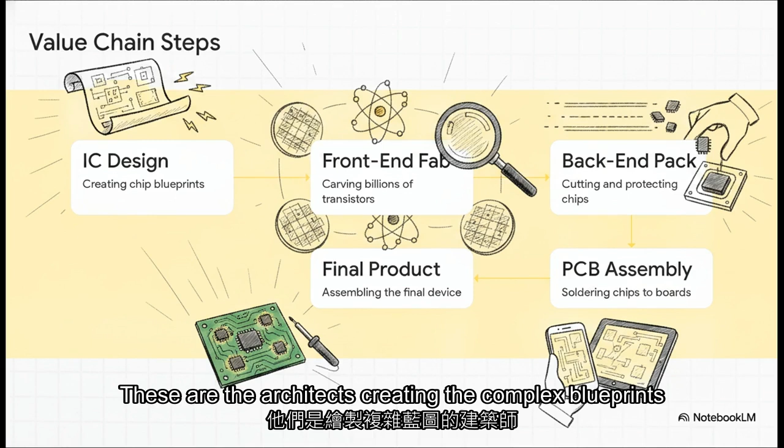Let's kick things off with Section 1, the tech relay race, mapping the electronics value chain. Think of the birth of any electronic product as a massive, highly coordinated relay race. It starts at the very beginning with IC design companies. These are the architects creating the complex blueprints. Once those digital designs are finalized, the baton gets passed to the front-end fab, which really acts as the beating heart of this entire ecosystem.

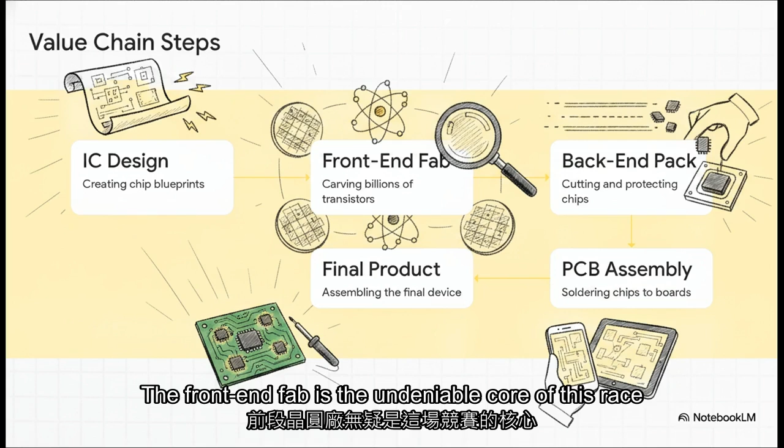This is the crucial stage where blueprints for billions of tiny transistors are physically carved onto raw, circular silicon wafers. After surviving that grueling process, those fragile wafers are passed to back-end packaging to be precisely sliced apart and encased in protective shells. Next, they move to PCB assembly to be soldered onto circuit boards, and ultimately they're integrated right into the final product you hold in your hand. The front-end fab is the undeniable core of this race. It's the crucible where pure imagination actually becomes physical reality.

Moving on to Section 2, the $16 billion fab, and why automation is everything. Remember that $110 a second loss we talked about a moment ago? Because the cost of failure is so astronomically high, a fab relies on a computer-integrated manufacturing system, or CIM. This is the fully automated digital nervous system of the factory, dictating every single movement and process. To avoid hemorrhaging money, fabs require this overarching software to maintain a staggering uptime of 99.9999%. To put that into perspective, that equates to less than 32 seconds of allowable downtime per year for an entire, sprawling mega factory. Stability isn't just a goal here, it is literally their highest guiding principle.

So why exactly is this environment so exceptionally complex to manage? Well, unlike traditional factories where engineers can just jump in and manually fix an assembly line, the front-end fab is a fully automated, completely sealed environment. Wafers move entirely automatically in closed, ultra-clean boxes called FOUPs, zipping along overhead tracks. There is virtually zero human intervention allowed on the line because we humans introduce unpredictable variables, like microscopic dust, which are absolutely lethal to the chips.

Furthermore, manufacturing modern advanced chips requires anywhere from 1,000 to over 1,200 completely separate process steps. Add in the fact that the system must intelligently juggle multiple different product types running simultaneously to maximize those expensive machines, and trace exactly which specific machine chamber a wafer passed through weeks ago for quality control. The logistical complexity is just staggering.

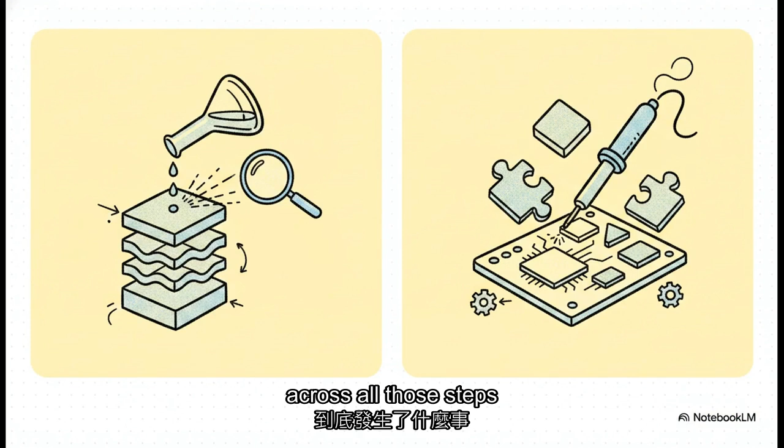Let's move to Section 3, Extreme Materials Science, Building Nanostructures. To truly understand what's happening inside those specialized machine chambers across all those steps, we need a fundamental mindset shift about what the word manufacturing actually means here. Traditional back-end assembly is what we typically picture, right? It involves managing a complex bill of materials, taking pre-made physical puzzle pieces and soldering them together.

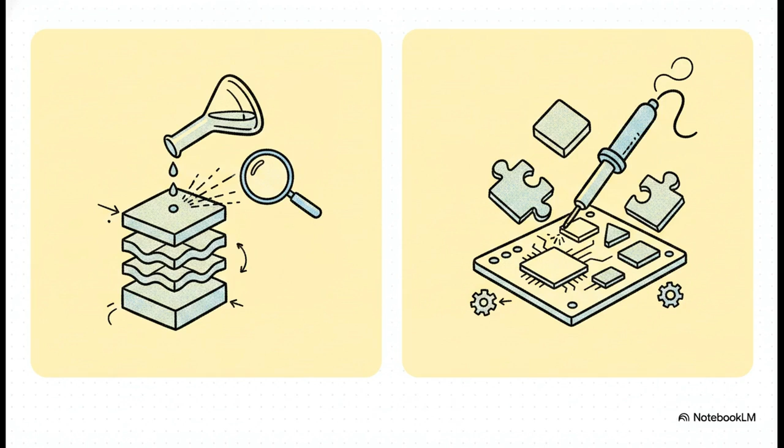But the front-end fab operates in a completely different paradigm. It's an exercise in extreme materials science. Instead of putting physical pieces together, it relies on the chemical deposition of ultra-thin films, the optical lithography of printing unimaginably tiny patterns with light, and the physical etching away of materials with plasma. It is literally carving and stacking nanoscale, three-dimensional structures layer by layer using aggressive chemical and physical reactions.

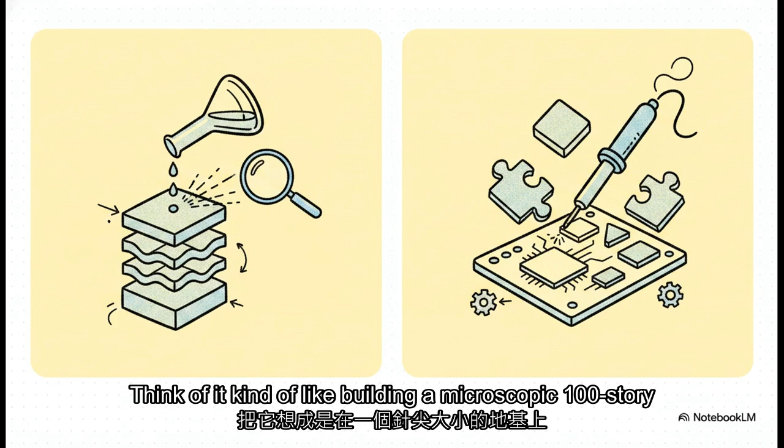Think of it kind of like building a microscopic 100-story skyscraper on a foundation the size of a pinpoint, where every single floor has to be structurally flawless. Which brings us to Section 4, measuring the invisible. Since this entire process relies so heavily on invisible chemistry and physics to build these structures, how do engineers actually measure their success before the chip is fully finished?

Well, for the vast majority of those thousands of steps, the wafer doesn't actually have measurable electrical properties yet. It's just a chemical and structural work in progress. So engineers have to rely on a mountain of non-electrical, physical data to ensure things are on track. They constantly measure film thickness to guarantee that the materials deposited are perfectly even across the entire 12-inch disc. They meticulously measure the critical dimension, checking the incredibly tiny line widths and trench diameters right after etching.

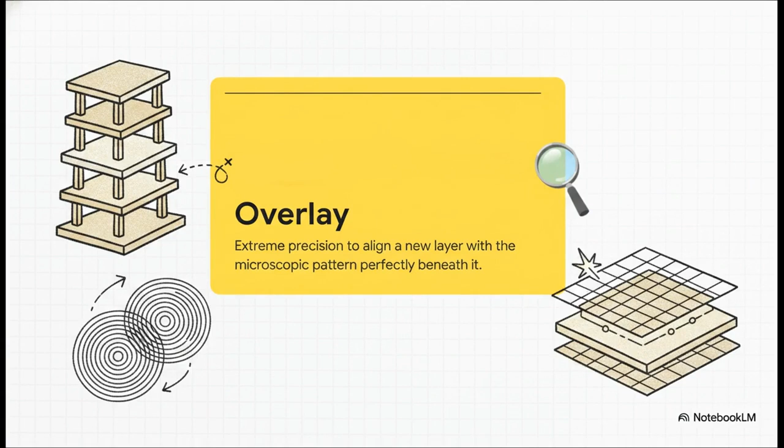And they obsessively monitor the defect or particle count. At this minuscule scale, a single speck of dust dropping onto a nanometer scale circuit is like a massive boulder crushing a multi-lane highway. It destroys everything it touches. But perhaps the most critical physical metric of all is called overlay. Think back to that 100-story building analogy we just discussed.

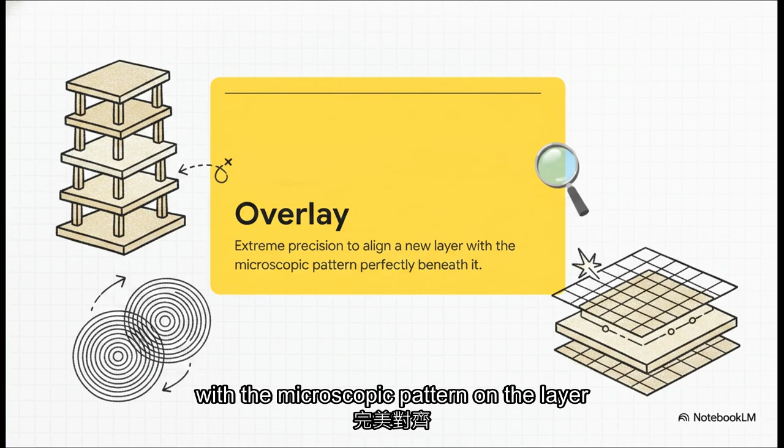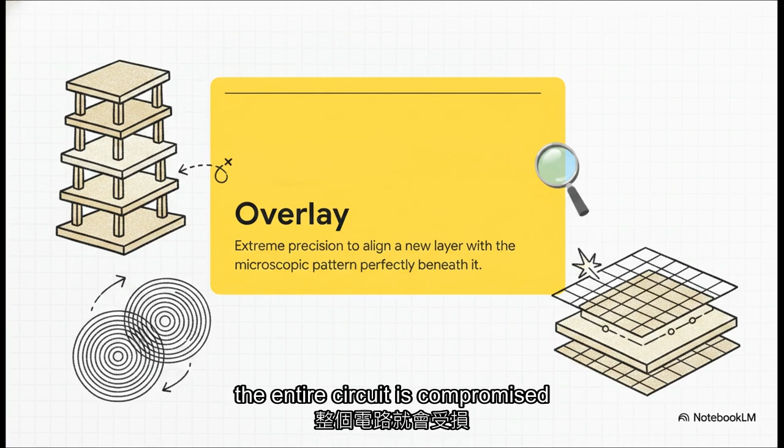Overlay refers to the extreme precision required to perfectly align a newly printed layer with the microscopic pattern on the layer directly beneath it. If the support pillars on the 50th floor of our nano skyscraper don't perfectly align with the foundation on the 49th floor by even a single nanometer, the entire circuit is compromised, potentially shorting out and ruining the final product. Now, this brings up a truly fascinating problem.

Probing and measuring these extraordinarily delicate nanostructures with high-powered lasers or electron beams could actually destroy the customer's proprietary intellectual property or physically damage the very product they're trying to protect. So, how do they measure it safely? The answer lies in some seriously ingenious workarounds. Rather than risk the actual product, fabs cleverly use proxy targets called test keys.

These are specialized test patterns printed in the tiny, empty grid spaces between the actual chips, areas known as scribe lines, which are destined to get cut away by diamond saws and thrown out later anyway. Engineers scan and measure these test keys instead of the real chips. Additionally, they use sacrificial monitor wafers, which are just blank pieces of silicon run through a machine to strictly verify if things like temperature, gas flow, or etching rates are drifting out of spec.

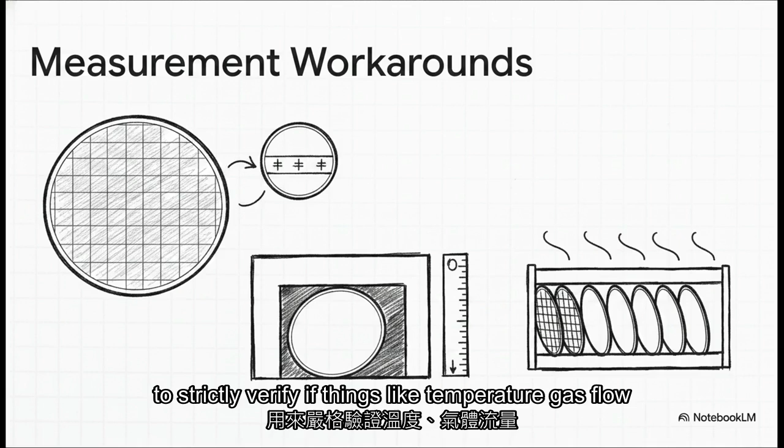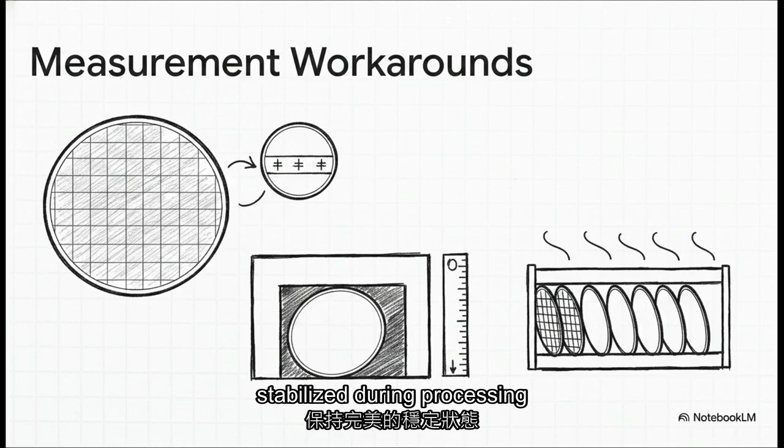They also employ dummy wafers simply to fill empty slots in a batch carrier, ensuring that airflow and thermal dynamics remain perfectly stabilized during processing. It's an incredible, highly orchestrated web of indirect monitoring. Finally, Section 5, the final test and beyond.

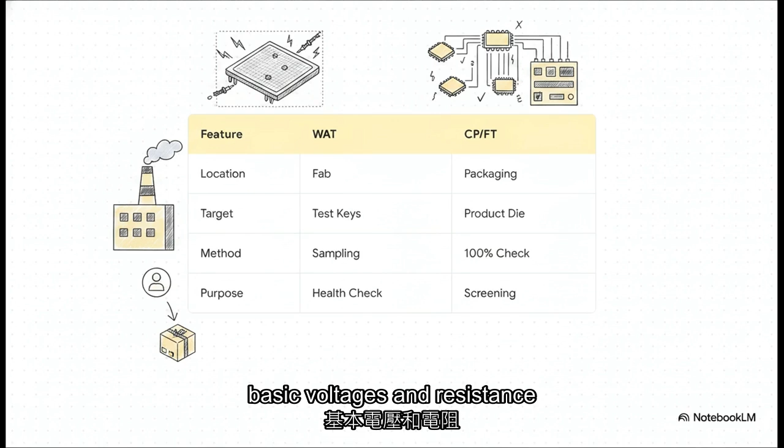After surviving over 1,000 physical, chemical, and optical hurdles, the resilient silicon wafer reaches the absolute end of the front-end process. Before leaving the fab, it undergoes a wafer acceptance test, or WAT. This is a monumental moment because it's the very first time real electrical currents are applied to check basic voltages and resistance. But the target is key here. It only tests those throwaway test keys on the scribe lines we just talked about.

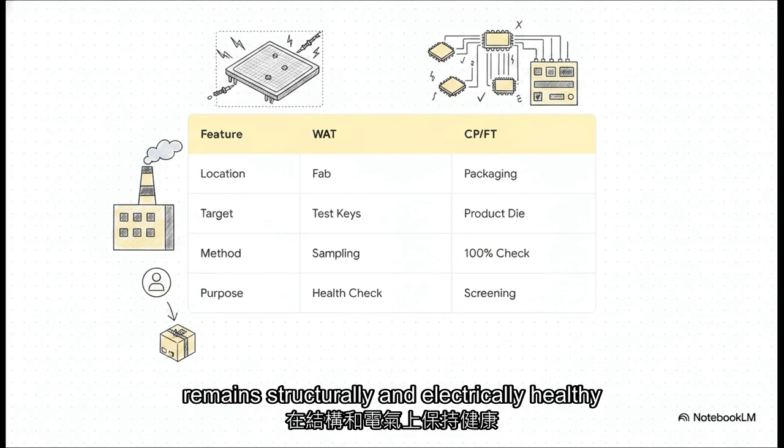And it uses a strategic sampling method, just checking a few spots across the wafer to ensure the overall manufacturing process remains structurally and electrically healthy. This is completely different from the wafer sort and final test happening later at the back-end facility, which meticulously tests 100% of the actual, real product dies to rigorously screen out any bad chips before they ever reach the end consumer.

All of this extreme material science, unbelievable automation, and precise measurement leaves us with a really provocative thought as we wrap up. As our microchips continue to shrink past 2 nanometers, pushing down toward the scale of individual atoms, what we call the 0.1 nanometer or Angstrom era, we are slamming right into the absolute limits of quantum physics.

Will our current optical and electron beam measurements even be enough, or are we on the precipice of needing entirely new, perhaps quantum sensing models to measure the invisible future of technology? It's a massive, incredibly expensive challenge that will undoubtedly determine the next era of semiconductor dominance.